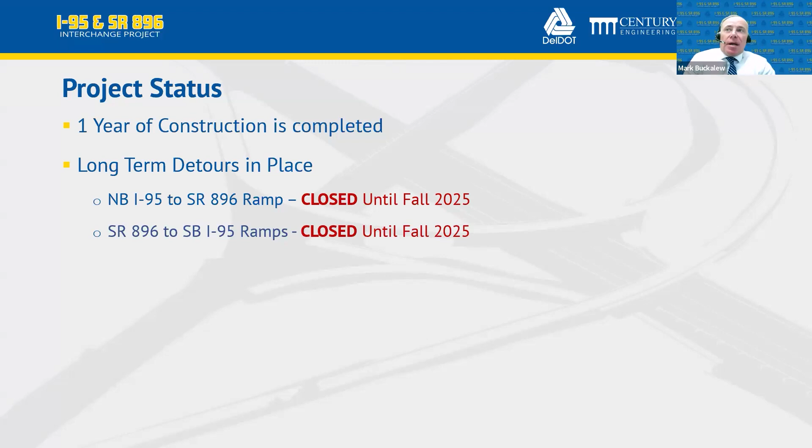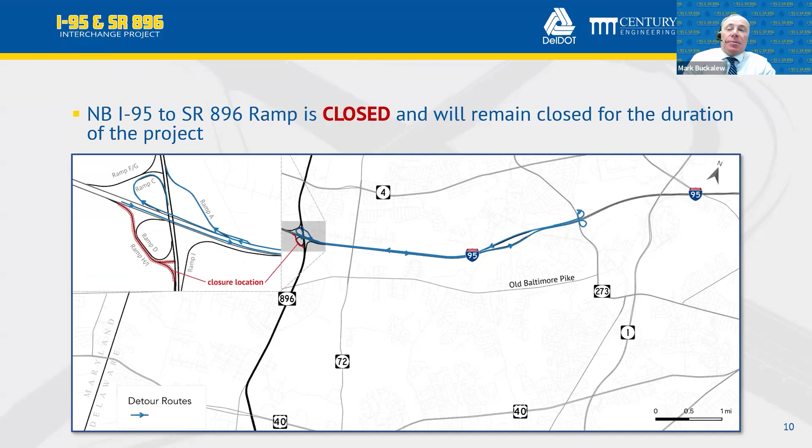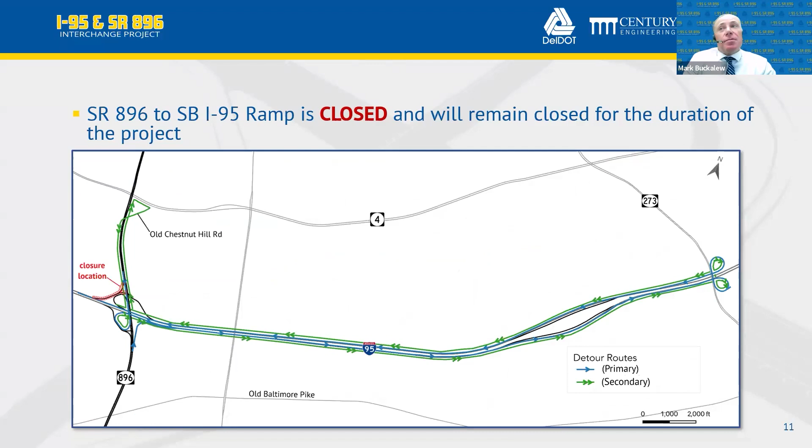Year one of construction is finished. We have our long-term detours in place, which is the Northbound 95 to SR 896 ramp that's closed until about the fall of 2025, and the SR 896 to Southbound 95 ramps, also closed until fall of 2025. We have the detours up, mostly for the Northbound 95 to 896 - you'll just continue along 95 and take the SR 273 loop ramps and circle back down to 896. That's a fairly simple detour. And of course, if you're traveling southbound SR 896 to southbound 95, that detour is really the same thing - just go northbound on 95 and use the SR 273 loop ramps to come back down to southbound 95. A lot of people end up just taking SR4 to Elkton Road to get around the toll if you choose to.

Our current project status: we're currently in phase 2A of construction. We're currently widening northbound and southbound 95 for the new flyover ramps. This includes widening of the existing bridges over Norfolk Southern and SR 72. We're currently constructing the 5 new bridges for the new flyover ramps, and we're widening southbound SR 896, the interchange down to the Glasgow High School entrance.

Today, the right turn lane from southbound 896 to Old Baltimore Pike is closed. That'll be a 14-day duration. We really need to reconstruct that right travel lane and turn lane, so the only way to do that safely is to close that right turn lane for that brief duration. This is an accelerated schedule, so contractors will get in, get the work done, and get out, because we understand the big impact this will have on the community. We don't want to take any longer than necessary.

We're also widening northbound 896 from Old Baltimore Pike up to the interchange. When I say we're in phase 2A, the contractor is currently working in multiple phases, trying to get as much work done as possible with the amount of workspace they have. So we call it phase 2A, but they're currently working in multiple phases on this project.

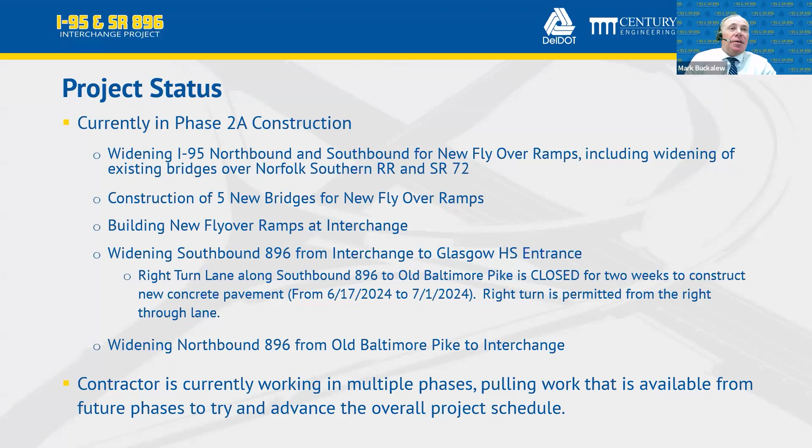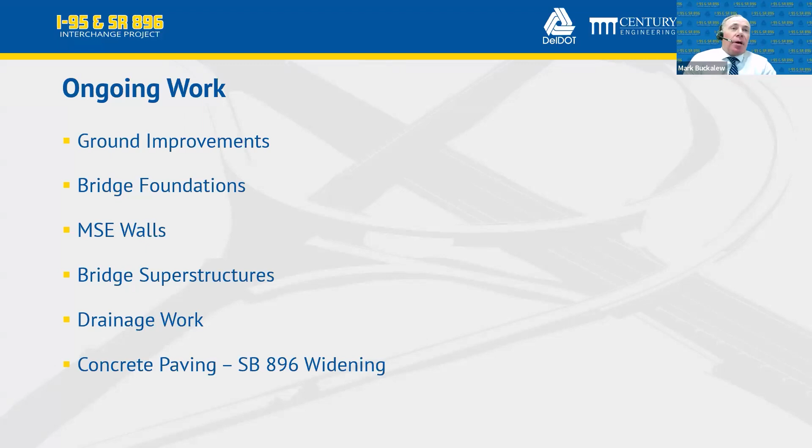Our ongoing work includes ground improvements. I'll show you the locations on southbound 95 at the 896 interchange, currently doing some bridge foundations, constructing MSE walls for bridge superstructures. Everyone can see the steel flying through the air, and of course the drainage work is ongoing, along with concrete paving along 896.

This is great drone footage of the interchange, looking at southbound 95. This is the future exit to SR 896, either northbound or southbound, and this is the approach to that flyover bridge to go to southbound 896.

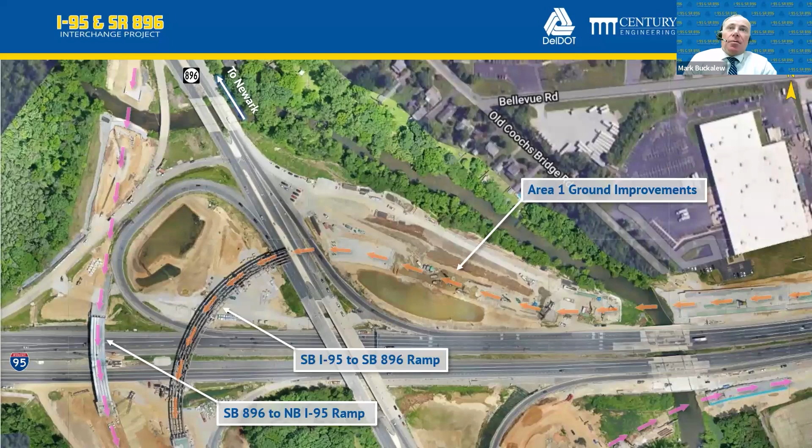You can see area 1, which we call the ground improvements. There's significant work ongoing there. I have another photo of it a bit later.

This is another drone shot, looking southbound on 95. On the right-hand side, you'll see the approaches for the southbound 95 to 896 exit, and on the left-hand side, the 896 to northbound 95 approach coming in the northbound 95 direction.

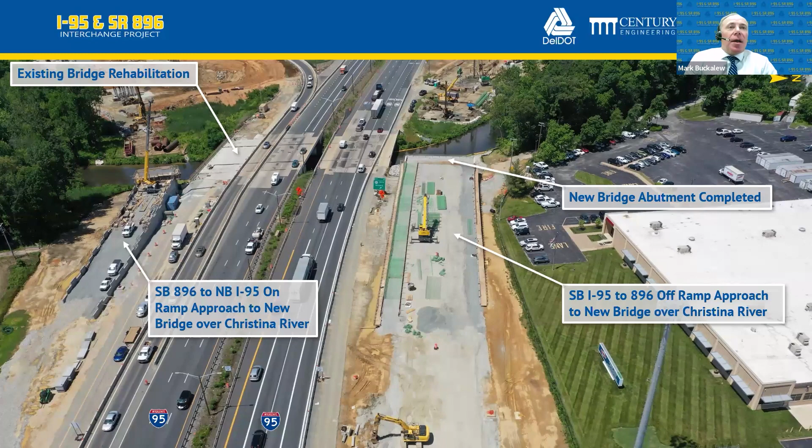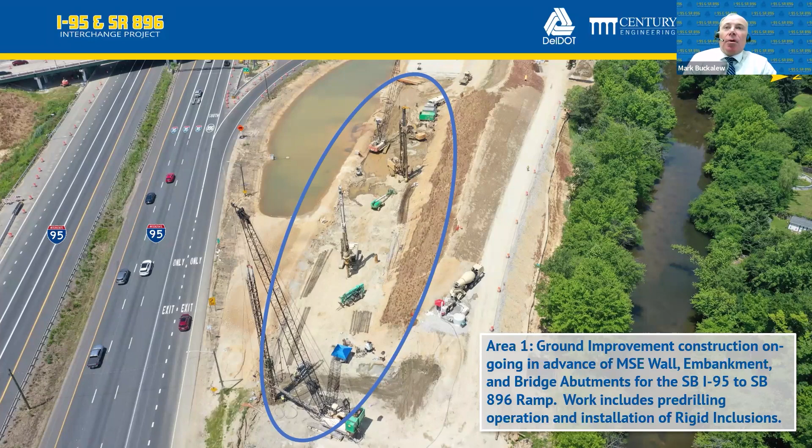This is one of my favorite drone photos. It really shows 896, the southbound 95 to southbound 896 flyover ramp, and the southbound 896 to northbound 95 flyover ramp going over 95. You can really see there's a lot of work going on here. A lot has been done—they've only been working a year, and it's a tremendous amount of work for that time. They're making great use of their time and resources out here.

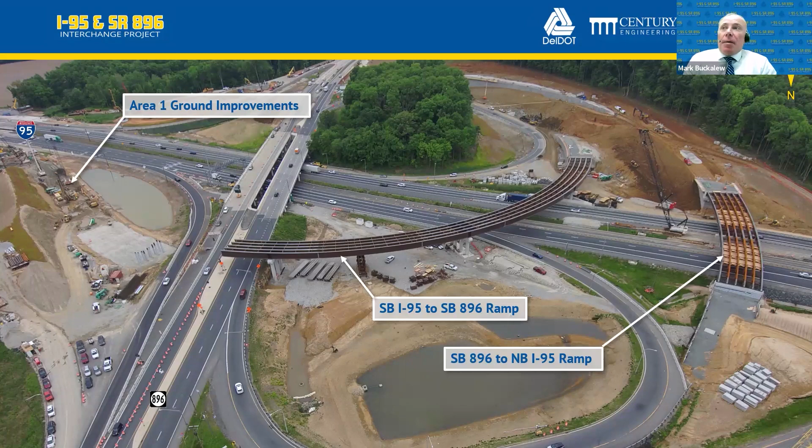This is the southbound 896 to northbound 95 ramp. You can see they have the SIP forms down—stay-in-place forms, that aluminum-looking sheeting on top of the girders. This is what they'll place their concrete bridge deck on after setting the forms and the rebar. You're going to start seeing a lot of work on this bridge in the near future.

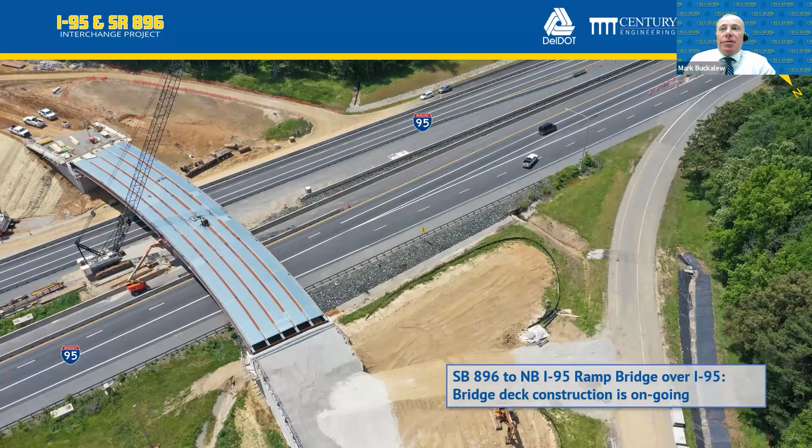This is the southbound 896 to northbound 95 ramp going over the Christina River. They have one of the abutments completed, and the piles driven. They'll need to construct the rest of that abutment on the southern side of the Christina River before they can set steel or girders there.

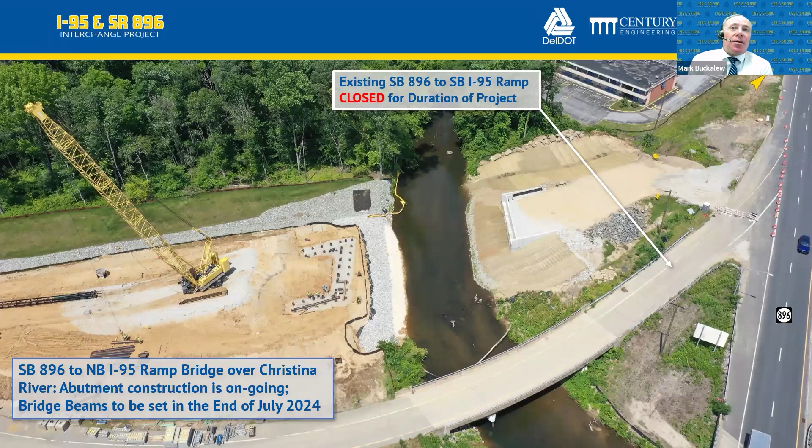Here's the southbound 95 to 896 ramp and the SR 896 to northbound 95 ramp. You can see both of these start to converge a little bit. One is going to take you underneath—the southbound 95 to southbound 896 ramp will go underneath the southbound 896 to northbound 95 ramp. You see the little pink and orange arrows, showing the direction traffic will flow through there when everything's completed.

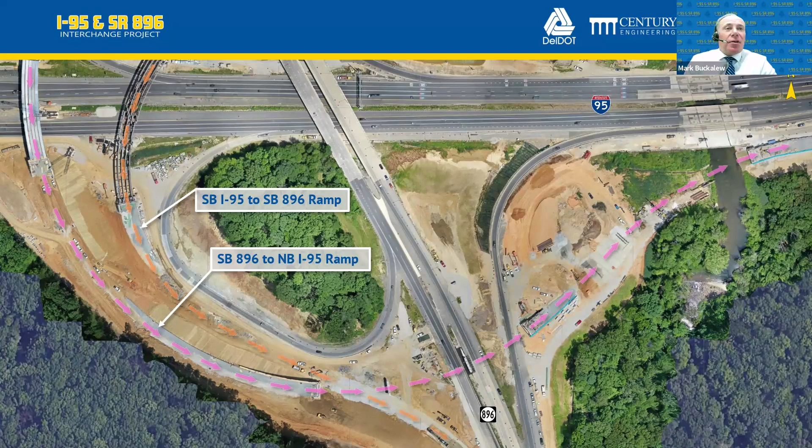This is again the southbound 896 to northbound 95. They completed the MSE wall, and the bridge abutment there is completed. If you look over on the left side, you'll see some equipment moving material.

This is over on the Iron Hill side, but that's where the future shared use path is going to go, which will give the community an opportunity to go from one side of 95 to the other, which really didn't exist in this area. When this project's completed, this is going to be a really nice feature for the community, being able to get across 95 on a bike, jogging, walking, or however you want to travel.

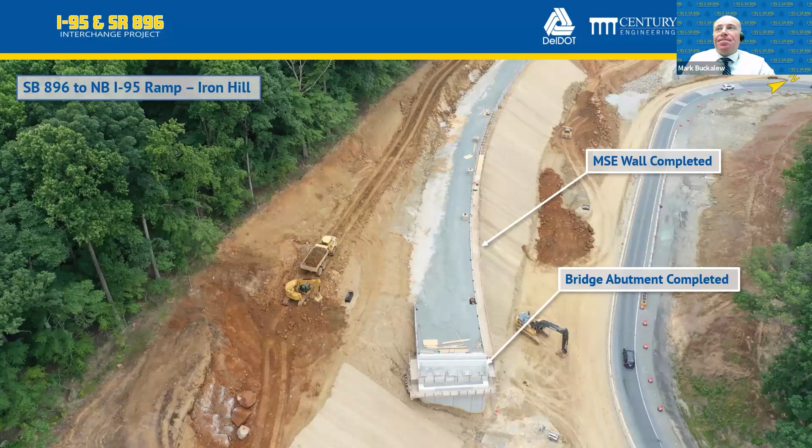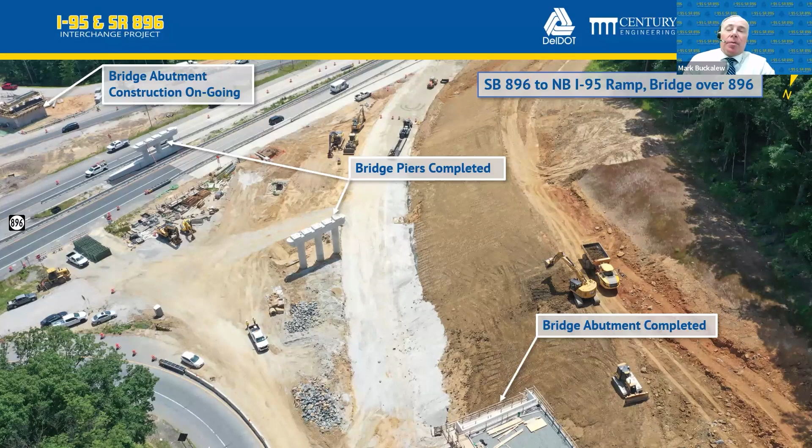Again, you'll see you're looking at the Iron Hill side. This is the southbound 896, northbound 95. This is where hopefully you should start seeing some steel going in the air, linking the abutment to the piers and all the way across 896. We'll talk about some traffic impacts that are going to be necessary at night when they set this steel, but you can start to see everything coming together now and get a picture of what these ramps are going to look like when we're finished.

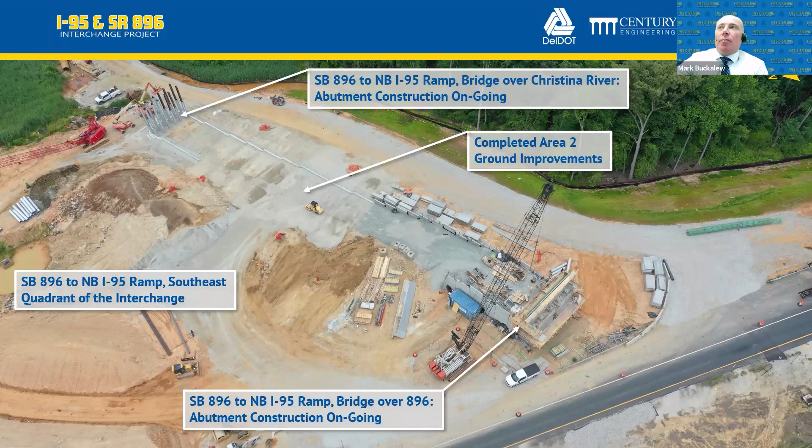Continuing on the southbound 896 to northbound 95 ramp, they finished driving some piles on one abutment there. They still have some piles left to drive on this project, but they're just about finished driving piles, which is really good news because that can be a little noisier. So the pile driving is almost complete out here, but you're starting to see this section come together, which is just north of the 896 on-ramp but south of the Christina River.

As we continue along that same ramp, you'll see the abutment finished on the north side of the Christina River. They're driving piles for the southern abutment. This is the ramp from southbound 896 to northbound 95. You start to see how that's going to come together through there.

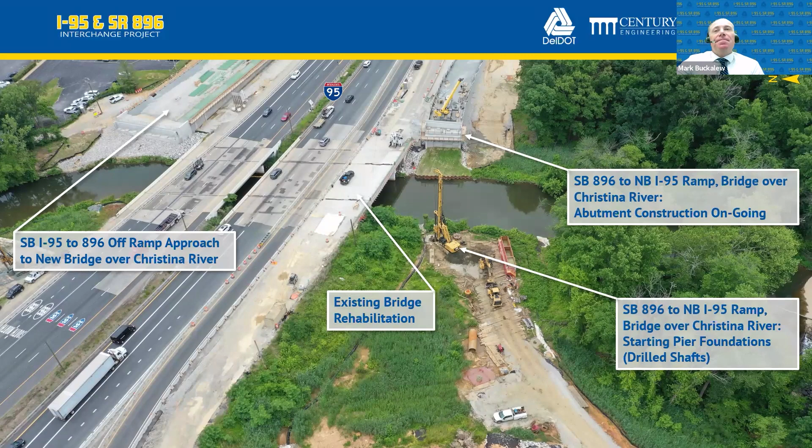As we continue heading north on 95, you see a lot of the widening occurring on southbound and northbound 95. They were able to finish the precast arches, the arch beams going over top of Norfolk Southern's tracks there. That was a big activity they had to complete, and they got it done. Sometimes working with the railroad, coordinating schedules can get a little dicey, so that was a big piece to staying on schedule to get those arches set.

And of course we have SR 72. The piers are finished there, the abutments are getting finished there, and we hope to be setting steel pretty shortly for 72, which is going to be good news for the community, I think. I'll talk about that a little bit later as well.

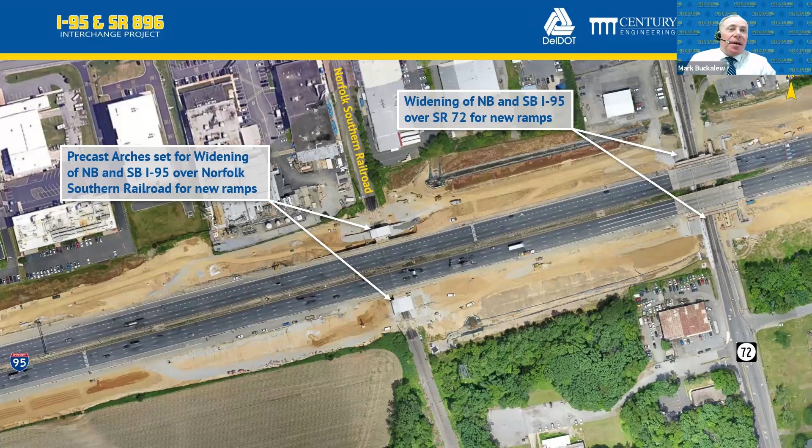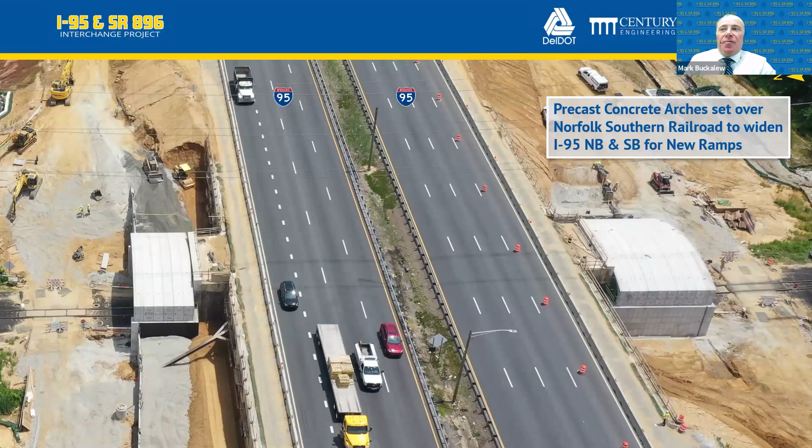Here's a better photo of those precast arches that were set over Norfolk Southern. Again, this permits us to widen 95, getting everything widened over top of the railroad tracks. You should start seeing a lot more activity over there as we're able to widen out 95, now that those arches are completed. They can place more fill through here.

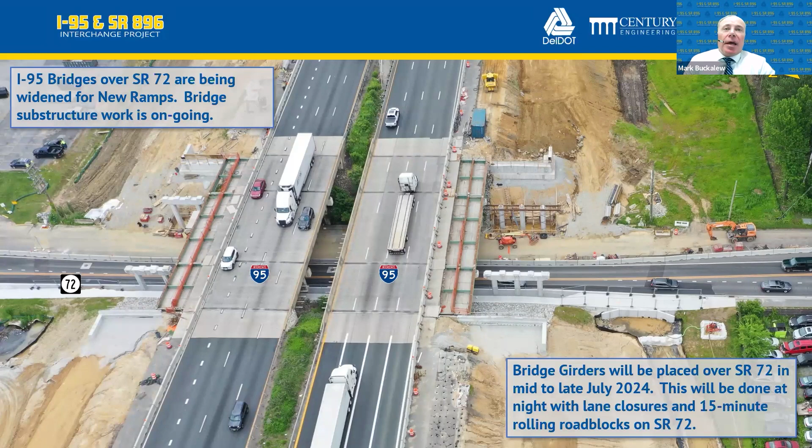Of course, this is the SR 72 overpass. You can see they're pretty close to getting done on these abutments and getting ready to set steel. They're hoping to set the girders over top of 72 sometime late in July, which is really good news, because once they finish that, they'll hopefully be able to reopen SR 72 to 4 lanes, 2 lanes in each direction. But I'll talk about that a little bit later.

Now let me pivot a little bit and talk about work zone safety, which is always high on the department's list, along with worker safety. Our people are our biggest assets. So we'll talk a little about work zone safety and some of the traffic numbers we're seeing along this corridor, along this project.

As we monitor crashes in the work zone, along 95, 896, and SR 72, you can see the reported crashes from '21 to '22, from '22 to '23, and from '23 to '24. Of course, '23 to '24 is when we've been under construction at this interchange. You can see an increase in crashes along 95 and SR 72, and a bit of a reduction in crashes along 896.

Probably a lot of that has to do with slower traffic through the work zone, which is a good thing, but we're still seeing elevated crashes along 95, which is always a concern for us, given the higher speeds, tight work zone, and reduced lane widths. So this is always something the department monitors when we're doing projects of this size and magnitude.

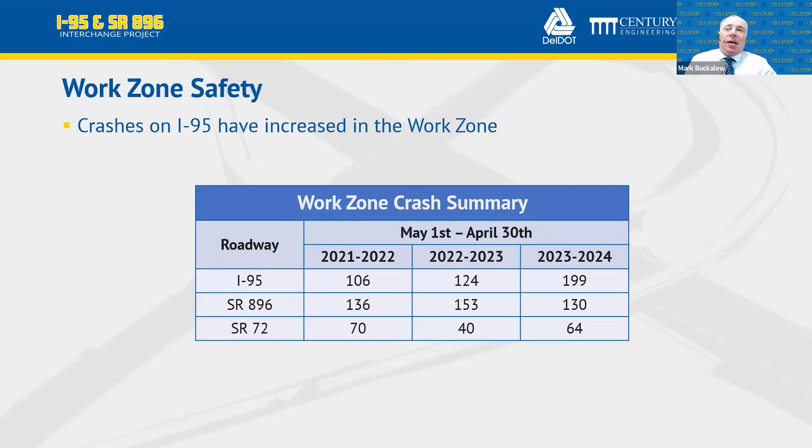We've implemented some safety improvements to improve communication and let drivers know what's going on as they're driving through the work zone. We implemented speed wizards, which show drivers how fast they're going in real time. We instituted wider striping lines at the lane shifts to draw the driver's attention to which lane they're supposed to be in. And we placed route shield markers and exit-only markings on the lane line so travelers knew what lane they were in, whether they're looking to exit or need to stay on 95.

We saw some benefits out of this on the viaduct, and we're seeing some benefits here, but we really need to drop the speeding through the work zone. That's really the biggest impact we're focused on.

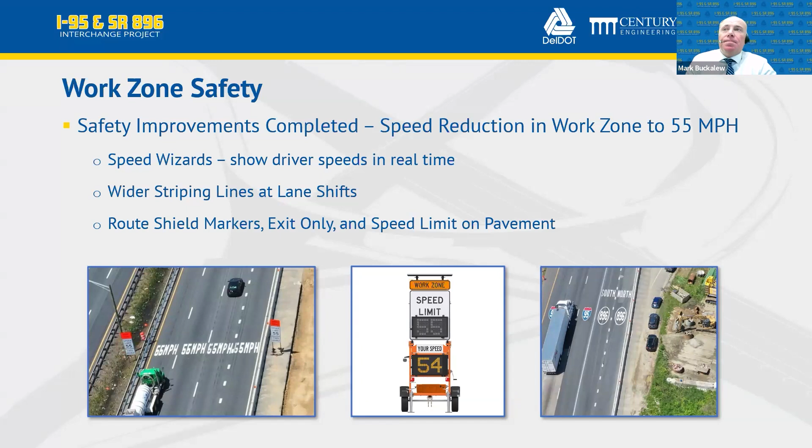In June of 2023, Governor Carney signed into law the Electronic Speed Safety Program, which we are going to put into effect on this project, the 95 and 896 interchange project. We did a pilot deployment on the Restore the Corridor project, the Wilmington Viaduct, several years ago, and we saw a major benefit through the work zone. We saw significant decreases in speeding along 95, and a precipitous drop in total crashes and injury crashes through the corridor. It was really a plus getting people to slow down through the work zone. We're going to be deploying the same electronic speed safety program here on the 95 and 896 corridor.

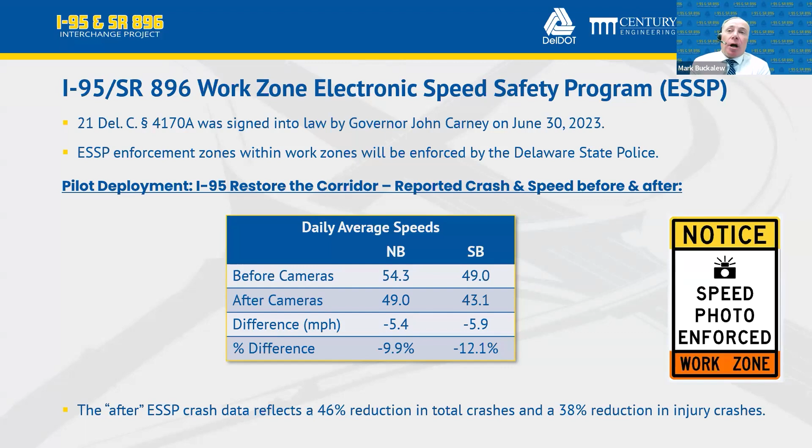We're going to be setting up the speed safety program along northbound and southbound 95.

We're not looking to write a bunch of tickets to a lot of people. We just want people to slow down through the work zone. That's the only intent out of this entire program, because we want our staff and the contractor staff to go home safe every night, and we want all of you to be able to travel through the work zone safely. We believe reducing the speed will do that. We've seen it on the viaduct — we saw reduction in crashes, we saw reduction in speeding. We want to do the same thing here. It's been a really good program for us. Again, we're not making money off this — we're trying to get you to just slow down. That's really what this is about.

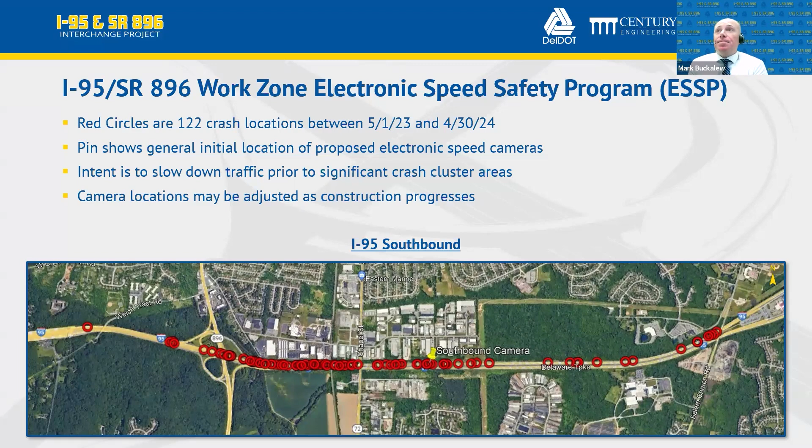Under the current program deployment process, we have to post a 14-day public notification. I just got updated on when we're going to deploy the electronic speed safety program. July 8th is going to be the first day we start monitoring and putting out the electronic speed safety devices. That means we have to put a 14-day public notification out, which CR is going to put out tomorrow to let everyone know we're going to start monitoring speed with speed cameras on July 8th.

Under the law, following the public notification period, we have a 21-day warning period. So July 8th we'll start putting the cameras out, and there's a 21-day grace period where, if you get caught speeding, a photo of your plate will be taken and a mailer sent to your house letting you know you've been speeding through the work zone, but you won't get a ticket during that time. After the 21-day warning period, which ends July 29th, we will start issuing citations to motorists driving 11 miles an hour over the 55-mile-an-hour posted speed limit. So citations will be issued after July 29th of this year.

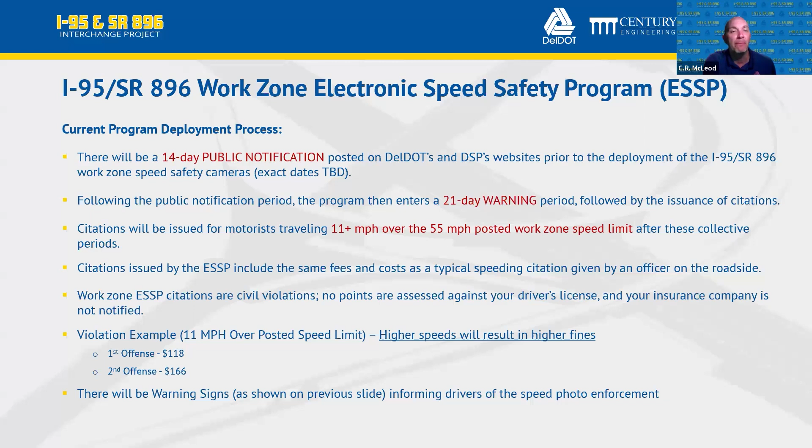Yes, I remember that, CR. Thank you, Steve.

Okay, so what to expect? What's coming up for the interchange? SR 72, again, we're down to one lane in each direction. We have that contraflow going on. We plan on opening that back up to 2 lanes in each direction before Labor Day, hopefully before school buses start rolling.

Fortunately, all of you have taken different routes. I have been through that corridor several times. I didn't see any congestion through there, but I know that's a key route for a lot of people. So before Labor Day, we should open 72 back up.

On 95, the southbound 95 to southbound 896 ramp, you're going to see a slight alignment shift, and I'll talk about that - Steve did a great slide on this one, I'll show you that in a few slides from now. You'll still have some periodic overnight detours along 95, just for some sign structures that have to go up.

You have some overnight detours for 896. When they set those bridge girders over 896, that'll be this summer - nighttime closures of 896 to throw the steel across it. So again, nighttime detours there.

And of course, I don't think we're going to have to detour SR 72. I think we're going to try and do that with rolling roadblocks. But when they set the steel across 72, that's coming up pretty soon here across Route 72.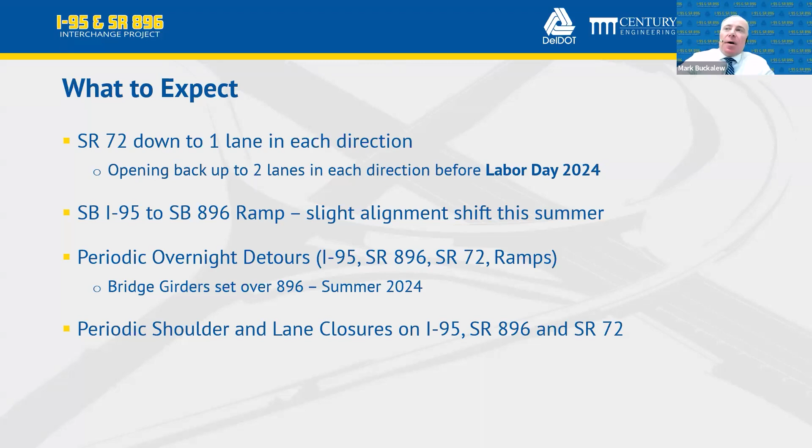And of course, we'll have some ramp closures here and there when we go to do the ramp shift from southbound 95 to southbound 896. We'll have to close that ramp to do some work there. Of course, you still have your periodic shoulder and lane closures on 95, 896, and 72.

All right, so the southbound 95, 896 ramp is the ramp you can see there. You see the little green haze to the left side of that ramp - that's the shoulder of where traffic is running now. We're going to start that radius a little bit sooner. What that will do is give us the opportunity to build that MSE wall where you see the proposed southbound 896 and northbound 95 ramp, giving the contractor an opportunity to build that MSE wall so they can start building that ramp in there.

And Mark, can you just briefly explain what an MSE wall is to the audience? Yes, thank you, CR. My apologies.

Mechanically stabilized earth wall is basically - you'll see those concrete panels, and they have straps that come off the backside of those panels into the soil, and we basically build soil on top of those straps, and that's what holds the panels up. Most interchanges use these panels that are set, and the straps go back into the soil, and the soil is actually what keeps that panel in place. So you'll start to see those going up along that ramp.

The contractor started those MSE wall panels, but they need a little bit more room so they can get the rest of it installed, so they can construct that ramp. It's just an impact to the schedule we need to get executed.

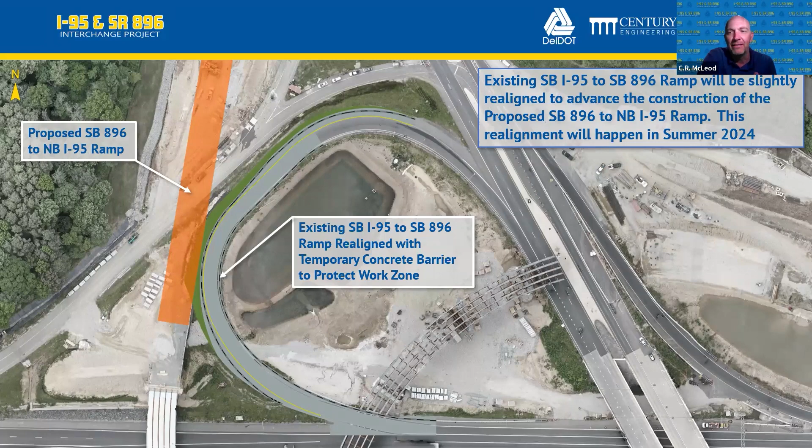So you're going to see that ramp shift at some point in the next couple of months. Of course, here's the other section of girders.

That's over 896. This is the southbound 896 and northbound 95. These girders will be set sometime during the week of July 8th. It's highlighted there in the orange hue, showing you where those girders are going to be placed over top of 896.

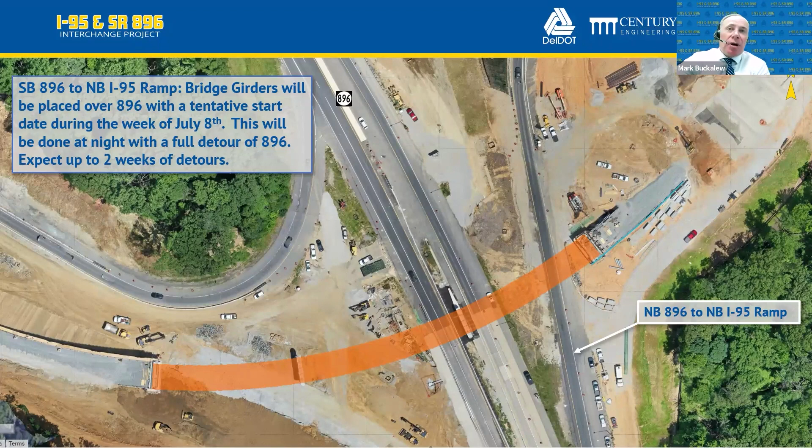Again, that'll be an 896 detour when we do that. I think it's going to take them about 2 weeks to do that work. Of course, it's going to go on at night, so it won't impact daytime travel. It'll probably be after 10 p.m. before they close 896 and do that work.

And this is the last piece of these girders that were set previously. This is the southbound 95, the southbound 896. That was one of the earlier girders that they set.

Once they're done with that abutment, that northern abutment, they can finish setting those girders across 896. But you won't see that happen until that abutment is completed.

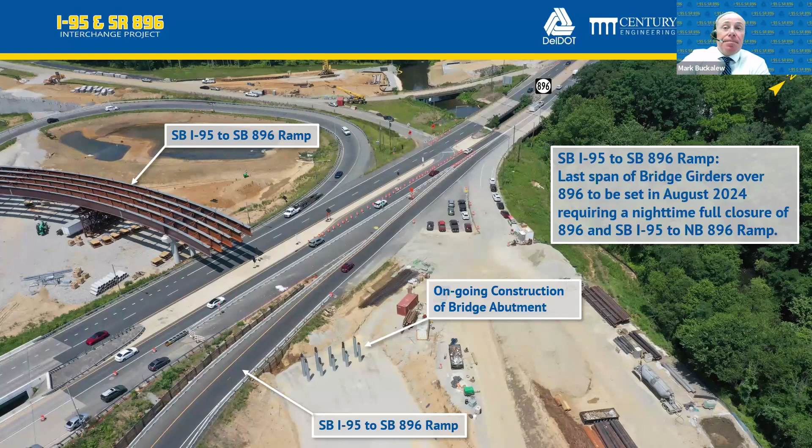So there's an MSE wall, CR. There's an MSE wall that faces the Cooch's property. That is the southbound 896 and northbound 95. You can see highlighted there as MSE wall and MSE wall.

That MSE wall has a different panel look to it. It has a different face to that panel. It's special for the Cooch's property. And we are working with the consulting parties for the Cooch's Bridge, historic bridge.

We're going to be staining those panels certain colors to match the surrounding area, to give that more of a natural look to the MSE wall. Again, that's what's going to be facing the Cooch's property there.

No other segment along this interchange will have these special panels or the special staining that these panels will receive, but it will really give it a nice natural look to match the community, to match the surrounding area there. It's going to face the Cooch's property.

Mark, one other quick thing to note too is that that's just part of phase two. After this project is complete, we are also going to be having a landscaping project too. I just want to make note that there were a lot of trees that had to be removed within the limits of construction here. We're going to try to replant as many as we can in the area afterwards.

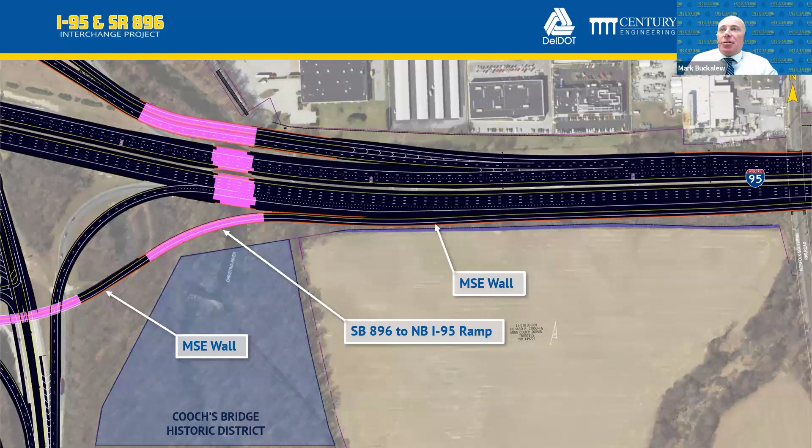Yes. Thank you, Brianna. Thanks. Yeah, we understand the impact that this project had, and we want to replace a lot of trees that were taken down. So that was very important information. Thank you, Brianna.

So I think this is why everybody's on. When are the ramps opening, right? That's what you want to know. It's what you tuned in at 6 o'clock for, and now it's 6:30.

The southbound 896 to northbound 95 ramp, we intend on opening that in the fall of 25, as well as the 896 to southbound 95 ramps. We're going to open those up in the fall of 25, as well as the northbound 896 to northbound 95, which will also open in the fall of 25.

What will push into spring of 26 is the northbound 95 to 896. That's going to open in spring of 2026, as well as the shared use path, which again is a major highlight for this project. This shared use path will probably come together in 2025, but we won't be able to open it probably till 2026.

All right. So with that, I'm going to hand it back off to CR.

Okay, well, many of you have already taken advantage of our updates and visits to the project website. And for those of you that may be just joining us for the first time, we do have a number of ways that you can stay in touch and up to date. As this project continues, we're not quite at the halfway mark, as you just saw from the timeline that Mark shared. So we still have a way to go, and we want to make sure that we're keeping everyone informed as these next phases begin.

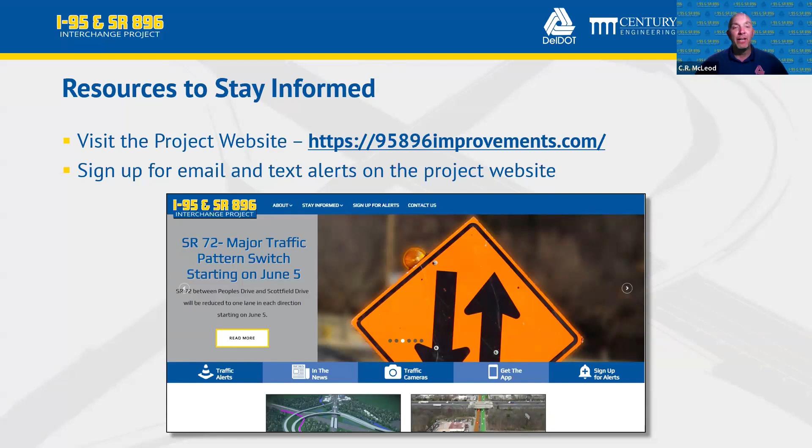I just was seeing a couple of questions come in about impacts of different closures that are going to be happening. Really, the email and text alerts are your best way to stay informed of when those are happening, even though many of those closures are happening in the overnight hours. For those working at night or needing to head out during the overnight hours, having that information ahead of time will save you a lot of aggravation, so you're not having to detour around the construction site at the last minute. So please take advantage of those tools available on the website.

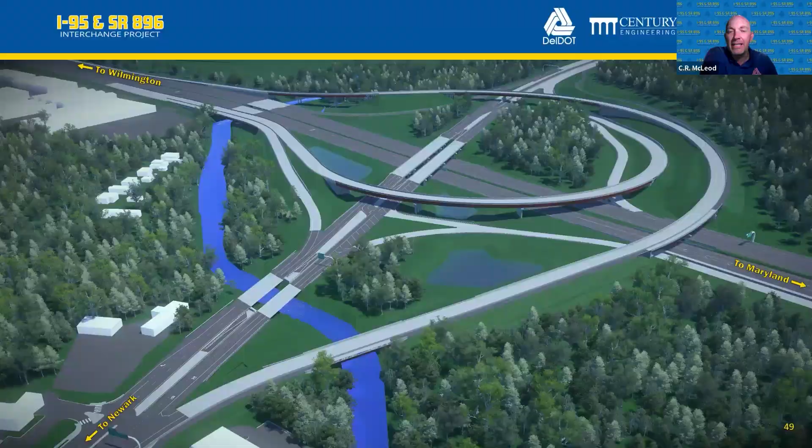For our next question, we've actually got several questions about the new pedestrian and bicycle path over I-95, asking for a description. We have a slide that shows this in more detail, and it's also on the website. Can we talk a little more about that new path that's going to be built? Yep, I can chat about that—thank you, Steve, for pulling this one up.

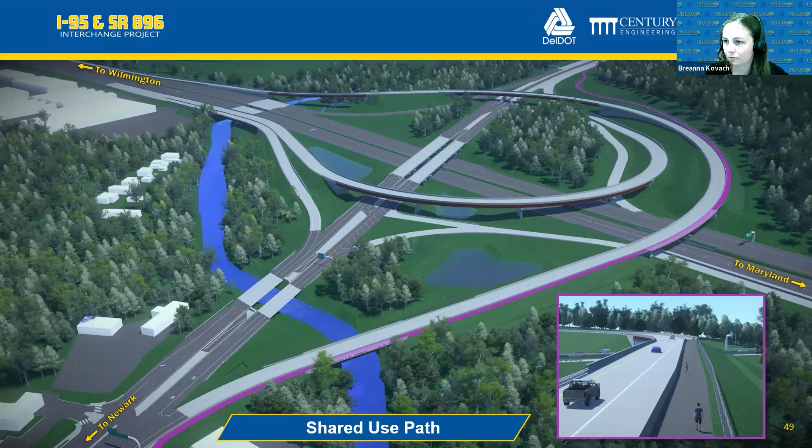The bike-ped path follows the alignment of the new southbound 896 to northbound I-95 ramp. From an orientation standpoint, you're rotated 180 degrees here—to the south on the screen is Newark. So if you're coming from Newark, you can follow that purple line along our new ramp up towards where Iron Hill is, then it spurs off and runs parallel to 896.

As CR mentioned, I'll give the plug for the website—you can check out a lot of this information at 95896improvements.com, if you want more detail about the background of the project and the proposed improvements.

I think I saw in the Q&A a question which Mark had mentioned a little bit—we are anticipating opening this in the spring of 2026. It's towards the end of the project and one of the final phases. I also saw a question about whether the trail will have access to the pond for recreational purposes, and it will not, so I wanted to let folks know about that.

This is a first-of-its-kind project in this state. We obviously have multiple crossings of I-95 here in northern Delaware, but this one will be separated by a barrier wall, so there will be no interaction with moving traffic. This will be a dedicated pathway just for bicycles and pedestrians to move through the area safely and reach the beautiful Iron Hill Park, for example.

Another question was how the bike lane will cross Old Baltimore Pike. The bike lane will run adjacent to Route 896 up to the Old Baltimore Pike intersection, and there is an existing pedestrian crossing at that intersection that one would need to use to cross Old Baltimore Pike and 896.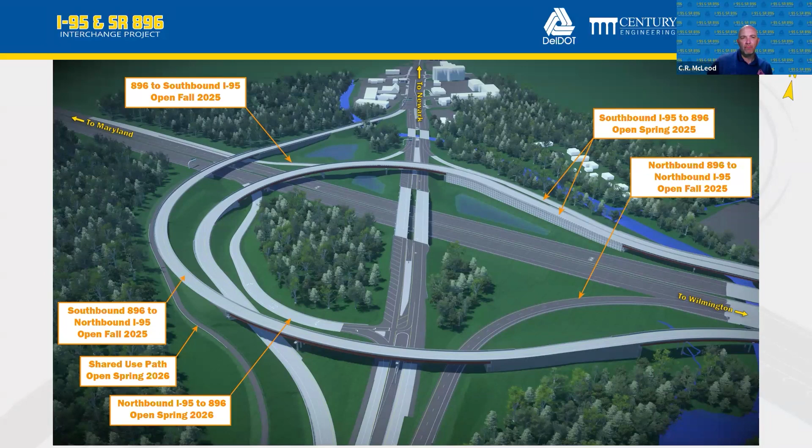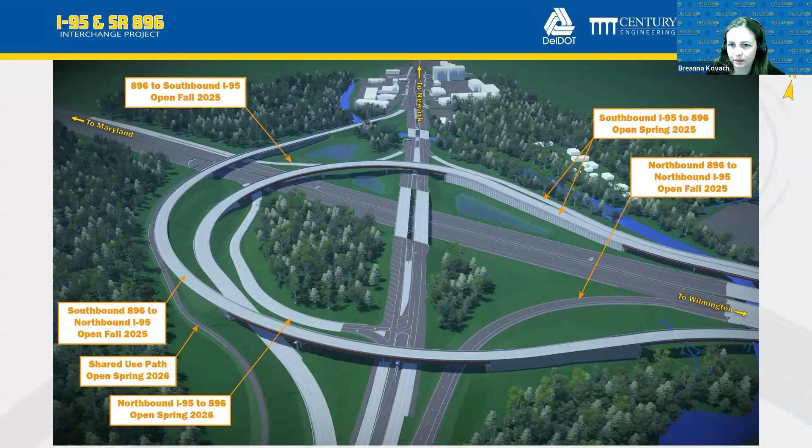Steve, I don't know if we're referring to, in the proposed condition, this southbound 896 to southbound 95 area. Yeah, that's what I'm trying to decipher, what ramp they're talking about - I think that's what it sounds like to me. And I would say that with our traffic folks, when we had gone through our modeling efforts and everything with the projected traffic volumes, that didn't seem to cause any pinch points for us.

Okay, agreed. And then just looking through here to make sure we've addressed the questions that have come in - if we've missed a question, or if you have any additional questions, feel free to email us after this at info@95896improvements.com, and we'll respond promptly. Have we received any questions to that email during the presentation?

Oh, here we go. A couple more just popped up there.

Just a question about tolling in this area on southbound 95. Do we have any plans to eliminate the tolls and make it open road tolling, which is being done in many states? At this time, I don't think there's a plan to go to open road tolling. I think every state would eventually love to do that, just not aware of it right now as I sit here. We do have the highway speed lanes, but no current plans to eliminate the existing toll plaza. And just to add, the first part of that answer will be the same as it is today. If you take the southbound ramp, you would have to go through the tolls like you do today. You wouldn't be able to get into the high speed lanes.

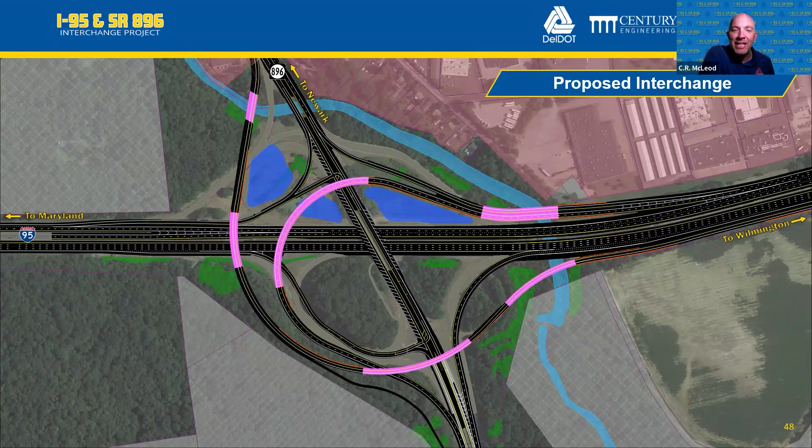Great, okay, well just pausing for a moment. Again, thank you all for the time and staying with us. We still have more than 60 people that have stayed with us since 6 o'clock to hear this update, so we really appreciate your time and excellent questions, as this is the largest project we have currently underway in the state. It's one of our most heavily used interchanges in the state, so we know it impacts many of you each and every day, and that you're eager to see this project get done, and we are as well.